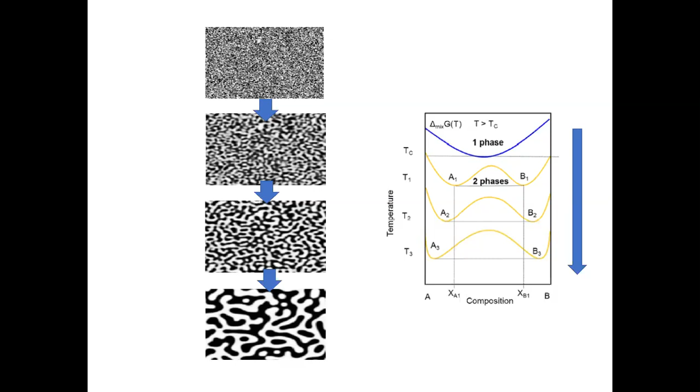And if you cool the system, and we know that just from the thermodynamic consideration, the free energy is going to develop a local minimum. This means that if you start with a composition right in the middle, for example, this composition will not be thermally stable, because we know by separating into two different phases with distinct composition, as suggested by the free energy curve, we can lower the free energy of the system, right? So this is what the system will do, lower the free energy by separating into two different phases. And this is basically the phenomenon of spinodal decomposition.

And we also discussed why you have curves like this, why the free energy wants to develop a local minimum as you lower the temperature. And one classic, very useful model to understand this phenomenon is the regular solution model, right? So you have a competition between the enthalpy of mixing and entropy of mixing. The entropy of mixing always favors the mixed state because this will always increase entropy, which contributes a negative term to the free energy. So increasing entropy always reduces the free energy. And the higher the temperature is, the larger this contribution is, right?

But on the other hand, if your enthalpy is competing against this effect, meaning that from the energy point of view, the atoms do not want to be mixed together because enthalpy increases if you mix them, you set up a competition between mixing and demixing, which is dominated respectively by the entropy of mixing and enthalpy of mixing. So the key parameter to determine which factor is going to win is the temperature, right? At a very low temperature, clearly I don't want to be mixed together because I virtually have no contribution from the entropy. The only contribution is going to be from the enthalpy. So I don't want to mix because this increases the free energy.

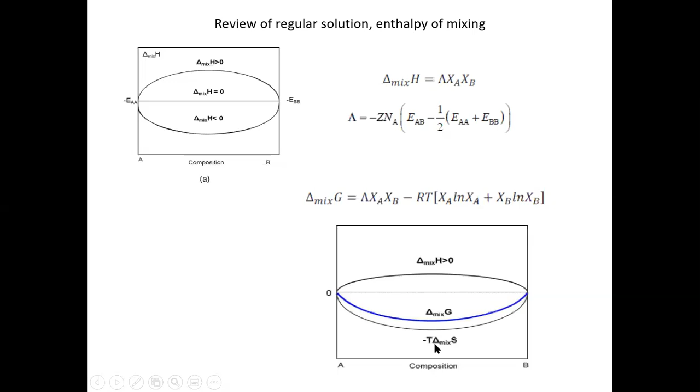But on the other hand, if you have very high temperature, now the entropy term definitely dominates and you want to mix together. From this very simple analysis, we know that as you change the temperature, you're probably going to introduce a transition because you're changing the role of these two competing effects. So at high temperature, entropy wins, so the system wants to be mixed. But as you lower the temperature, eventually enthalpy is going to dominate, and you favor the demixed state. So this basically drives the spinodal decomposition to occur.

That's the basic idea. And also from the free energy curve, suppose we have this symmetric free energy, which again is an example. We can easily use the double tangent construction, which we've seen many times, to construct the phase diagram. So suppose this is your free energy curve at different temperatures, and for each free energy curve we do the double tangent construction. We find the equilibrium compositions of the two phases, and then we map these compositions on the corresponding diagram here. And we're going to construct, in this case, a solvus, which separates the mixed solid phase and demixed solid phases. And if you connect these together, you have this coexistence curve. And this is basically the phase diagram.

And within this phase diagram, we know that, thermodynamically speaking, in the equilibrium case, if your composition is within this dome, you favor the two-phase coexistence scenario, right? If you're out of this dome, you can exist as a mixture. So that's basically what we already know from the discussion of regular solution and from the thermodynamic point of view. So this is kind of a recap of the regular solution and its thermodynamics.

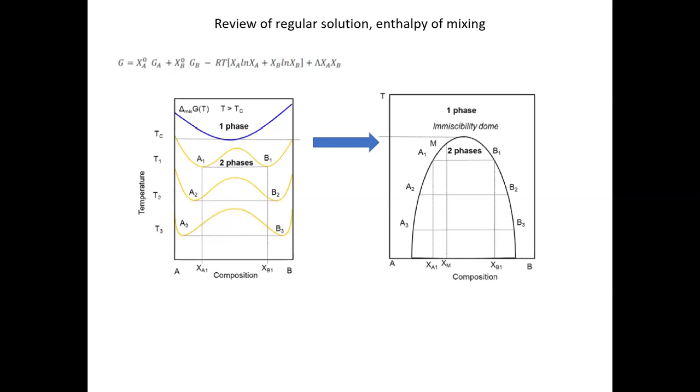So basically, from this very simple analysis, we see that although we know we can construct that dome, which I showed from the previous slide, something like this. Oops, why is it not working? Like this, right? And we know that any composition within this dome favors the two-phase coexistence as the more thermodynamically equilibrium state, which has overall lower free energy.

However, kinetically, if you look at the possibility to achieve that process, we see that not all the compositions within the dome are going to have the equal capability to really achieve that particular state of two-phase coexistence, right? We have good composition, we have bad composition.

So we see two examples, but mathematically, how do you distinguish the good composition and bad composition? What is the mathematical condition that tells you that this X naught is good composition and this is bad composition? If we think about what we analyzed, what's the key point to determine the good composition?

The key point is that if you start from a composition and then the composition separates into two different compositions, a minus and plus, the free energy after the small separation has to be lower than the original free energy. So this means that you have a curve like that, and this is your point. If you have a small separation and connect the straight line between that small separation, you want this straight line to be below the original curve. Does this make sense to everyone?

So this is a geometrical condition. But what do we call that mathematically? If we have a curve like that, we want the curve to basically curve down like this. What is the mathematical condition corresponding to this particular geometrical scenario? The mathematical term to describe whether the curve is going in this direction or in this direction is the convexity, or non-convexity or concavity of the curve.

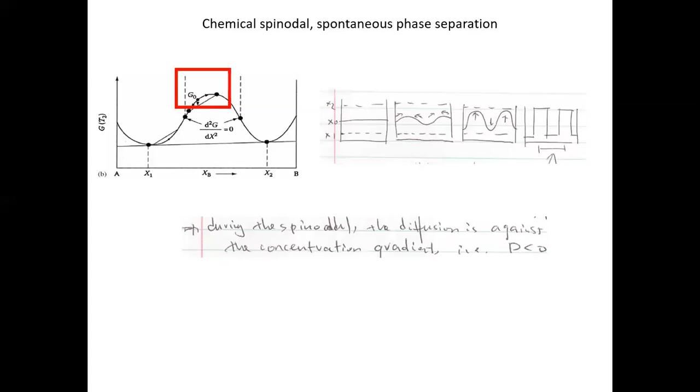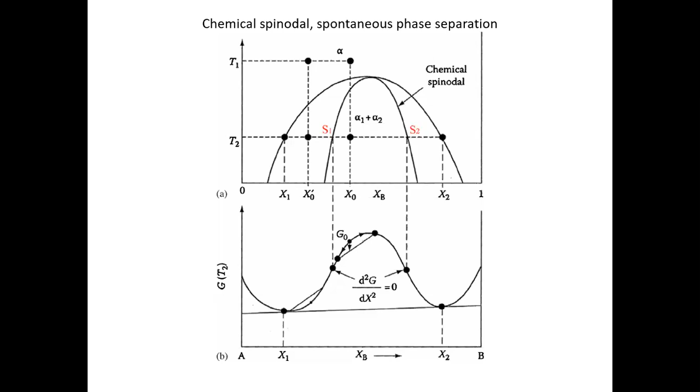show this. Okay, so I have a question about the miscibility gap, as defined. So this is a very good question. Typically, let me see. I think I have an explanation for that. So how do we define the miscibility gap? Typically the miscibility gap is defined as the outer dome. That's just from my understanding, but I think there might be a different way of doing this. But the miscibility gap is defined as the outer dome.

And then the inner dome or the inner envelope is typically what we call the chemical spinodal, which means that if you're within the inner dome, you have spontaneous instability. So you're never going to have any metastable state. If you prepare the system within this inner dome, there's no way that you can ever stay in the mixing state when you lower the temperature. But if you're, for example, outside the inner dome, there's still a possibility that you get stuck in this mixing state, although you want to be demixed.

So at least from the textbook that we're using, I think this is the notion that they define these types of things. But again, I'm not 100% sure if this is how the whole field is using it. Typically we just use the outer dome to define the miscibility gap, and the inner one is called the chemical spinodal, in which you have spontaneous instability. So that's I think what we agreed on. But feel free to correct me if you see people using a different notion in their own research.

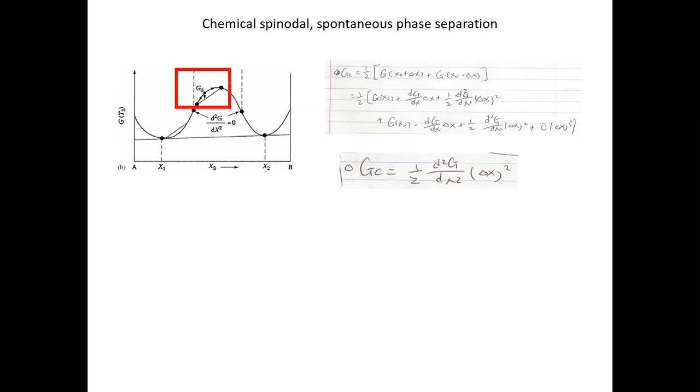But anyway, the driving force part I think is kind of clear for this one. And now we want to say a few things about the kinetics part, which is very interesting. The reason that it is interesting is I think you can already see, if you simply look at what happens during the spinodal decomposition, the normal idea of diffusion does not seem to be working here, in the sense that you start with an initial homogeneous mixture. But in here, there's no structure change. Everything's the same structure. So you're just dealing with diffusion alone.

So this is different from eutectic transformation and things like that. You just deal with the same solid structure and only deal with diffusion of the solutes, or motion of the solutes, rearrangement of the solutes into different regions. But the thing that you see here is that, from the diffusion point of view, if we consider this kinetics diffusive, this is going to be our starting point, right? And we did this many times when we discussed diffusion. You're going to start with a fluctuation like that, and diffusion will do what? The diffusion will smooth out the fluctuation and take you from this case all the way to this homogeneous case, right?

This is what we know about diffusion. It should go from right to the left. But if you look at spinodal decomposition, the direction of the evolution of solutes is completely different, right? In spinodal decomposition, you start with a homogeneous mixture.

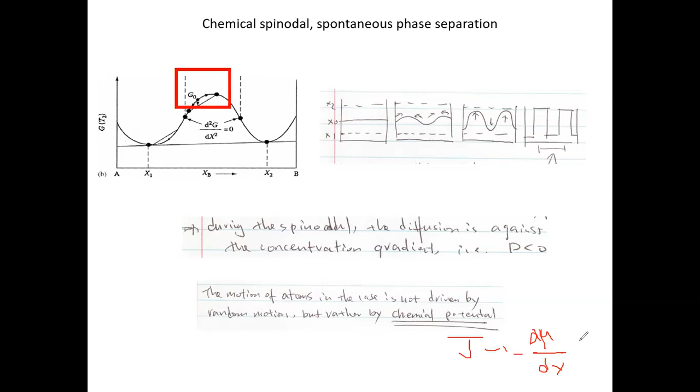But again, I won't go through more detail than this, but this is just a very interesting phenomenon to note, to revisit our understanding of diffusion and to see why here you have this apparently abnormal diffusive behavior, because now the driving force is not the concentration gradient anymore, it's the chemical potential gradient. Okay, so that's that part. So that's for the kinetics part.

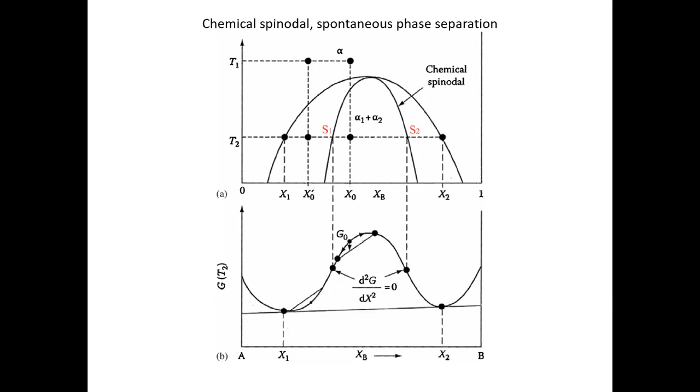And then, overall, if we consider the chemical spinodal, we have a slightly revised phase diagram, highlighting those regions for the very strong miscibility gap defined by the chemical spinodal, which we have already touched on.

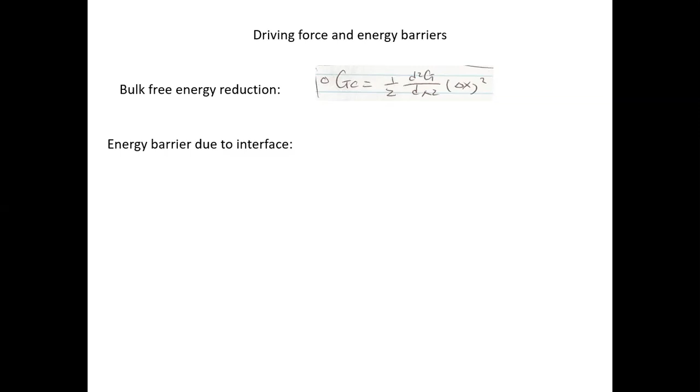So basically up to this point, we have talked about the driving force, which is the bulk free energy reduction if you're in a good composition regime, right? But we haven't talked about the barrier. I already showed this for you. So in this case, we also have a barrier, but this barrier is kind of interesting because the barrier itself is not very important in the beginning of the process, but gets stronger and stronger at the end. Now, what do I mean by this?

Well, if you think about a normal nucleation process, I'm just going to remind you, you start from a homogeneous liquid, for example, and then suddenly the fluctuation is going to create a solid. So this is kind of a very sudden process, right?

You just have fluctuations and the atoms within the small solid region get this crystal structure and you create a small solid. And at the same time that you're creating the small solid, you also create an interface, which is very sharp, in the sense that you can clearly distinguish liquid and solid structure. Does that make sense, everyone? I think this is okay.

And for the same reason, for the eutectic transformation, you have similar alternating stripes, but in most cases these stripes in the eutectic transformation have distinct crystal structures of alpha and beta phases, right?

So although you still have to worry about the difference of the composition, the crystal structure already gives you a huge increase of the mismatch strain energy that's going to cost you a lot for the interface. So those are the typical understanding of the driving force and the barrier, especially the barrier due to the interface.

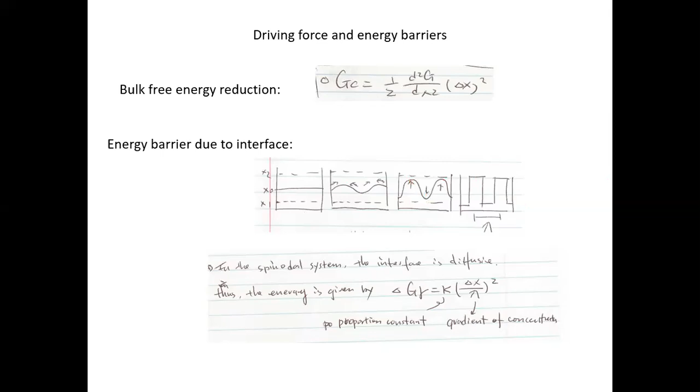So if you combine these two together, now we know how to deal with the driving force, and now we know how the interface plays a role during the entire process of the separation. So now we can combine these two together. Let me clear this.

Also there's a strain energy, I'm sorry, to the system. Although they have probably the same crystal structure, because the atoms are of different sizes, there might be a strain energy related to this. The strain energy is proportional to delta X, which is a composition difference, and K is the bulk modulus, Vm is the molar volume for the system, and eta I think is a strain.

So suppose the lattice here is A, and this changes a little bit. If you go from this region to this region, you have a change of the lattice. We're writing down the change of the lattice parameter as a function of composition. So if your composition varies a little bit from this region to that region, you have a slight change of the lattice parameter, and you get a strain here.

So for the same consideration, we write down the strain energy as a quadratic form. This is kind of a spring constant, and this is very much like the displacement of the spring. So you have this relation. Altogether you have another contribution, the strain energy, for the system. This is another source of barrier that you build in because it's a solid phase transformation.

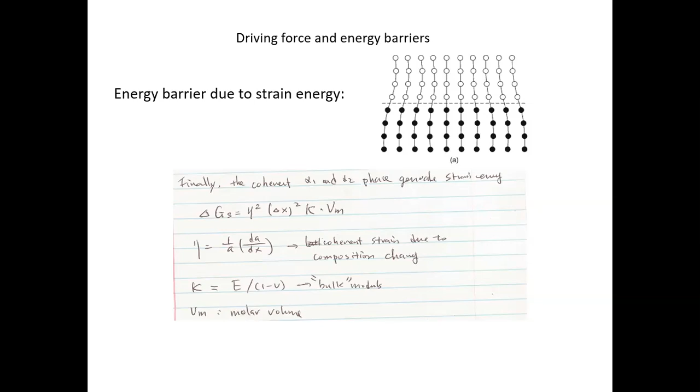So putting all of this together, we have the driving force, which is delta GC. We have the contribution from the interface, delta G gamma, which we already derived as this, and then we have the barrier from the possible strain energy, which is given by this. We were able to formulate all of these energy terms and barriers in the form of delta X, which is the initial fluctuation, the deviation of the composition from your initial composition.

So considering all of these terms together, we have the overall free energy difference for all composition, given by this. Now again, in the first set of analysis, we only focus on this one, because when delta X is very small, the contributions of these two terms are very small. So if we want to see whether the transformation can start or not by looking at the thermodynamics, we do not have to take into account these two terms.

But as the transformation proceeds, as the contrast of the composition gets larger and larger in the two regions, eventually the interface begins to play a role, and the mismatched lattice also plays a role. If you compare the terms, this one is going to be larger than this one, and this one larger than this one. Because they roughly have the same crystal structure, just slightly different lattice spacing, the elastic energy contributes least, and the interfacial energy next. This one may play an important role towards the end, but the major contribution is from the bulk free energy.

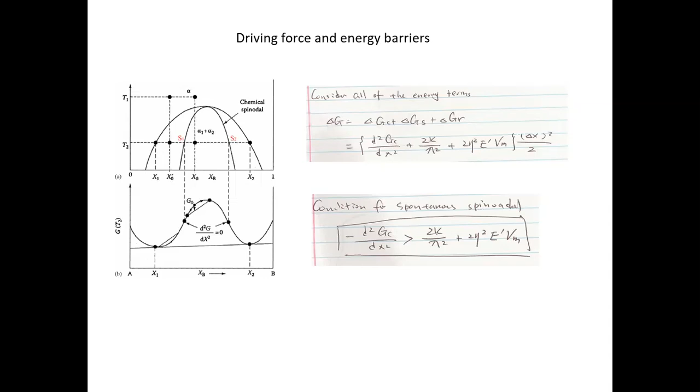For these systems, when you write down the phase field equation, basically you have to construct a free energy functional as a function of this field, right? This phase field, which is the phase parameter, which is this delta x. And for those cases, you need to worry about the development of interface, and we use very similar considerations and these ingredients to build into our phase field equations to simulate evolution processes, like the simulation that I showed. Let me quickly go back before this one.

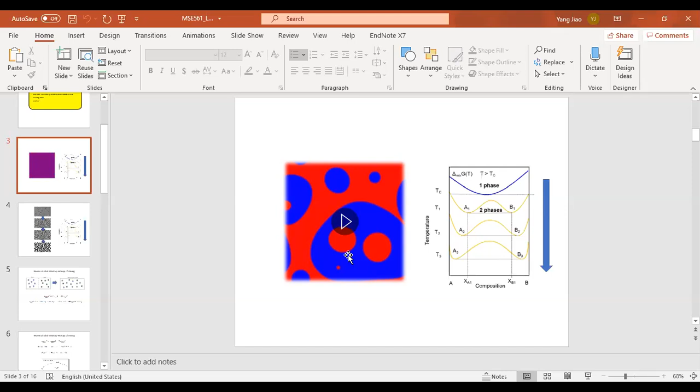Once it separates, it basically indicates that it satisfies the free energy requirement, but why does the system all become like circles eventually, or why are the interfaces optimizing? What is the benefit of having a circular shape? Reduced area. Reduce the area per unit volume, right? Initially the interface is not quite important, because we have a diffuse interface, but at the end of the separation, you have a sharp interface. So we want to minimize that.

In this case, there's no other way to reduce the energy, right? Because I already have the separation occur. So what I can do is reduce the interface area. I can optimize the shape so that it becomes circular, and this will lower the area of the interface, which clearly indicates the role that the interface plays towards the end. Okay, does this make sense, everyone? I think this is all I want to tell you about spinodal decomposition.

Okay, so this is just a quick recap of the topics. We introduced the concept, we revisited the regular solution model, which is beautiful for studying spinodal decomposition, and we talked about the driving force and barrier. And in the kinetic part, we showed that this is an excellent example of abnormal diffusion. In this case, the flux of atoms is driven completely by the chemical potential gradient and has nothing to do with the concentration gradient. So that's all I want to say about spinodal decomposition.

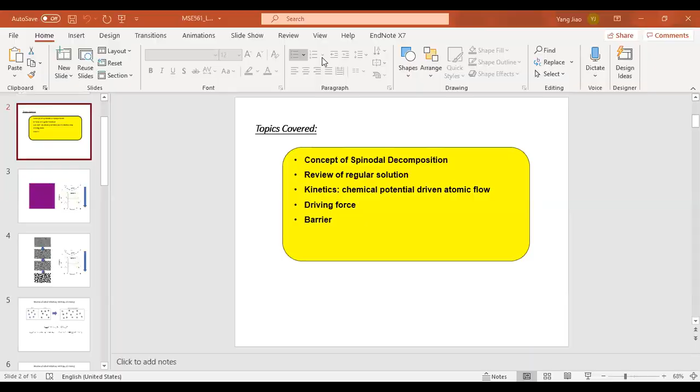Any questions before I switch gears and talk about, let me see, the last topic? Okay, so if there's no question, let me move on. This will be the last new transformation that we're going to discuss in the class. I know we've talked about so many different transformations, but I guarantee this is going to be the last one. So this is called martensitic transformation.

Or some people call this diffusionless transformation, and we'll see why that's the case. So if you don't have any questions about spinodal decomposition, let's start the discussion. This is a list of topics. We're going to introduce the concept of diffusionless transformation.

Okay, so if we have diffusionless transformation, this means we have diffusional transformation. And if you think about it, all of the transformations that we have been talking about are diffusional transformations, because they all involve kinetics related to the motion of atoms from one phase to the other, right? Whether diffusion is driven by chemical potential or by the concentration gradient, they all involve diffusion of atoms. But here, we have a transformation which involves no diffusion at all.

And as you can probably imagine, how can you prevent diffusion from occurring? You have to make the transformation very fast, and you have to cool the system so that the diffusivity of individual atoms is very, very small, right? So we can imagine that these transformations typically occur for faster cooling, and that is exactly what happens.

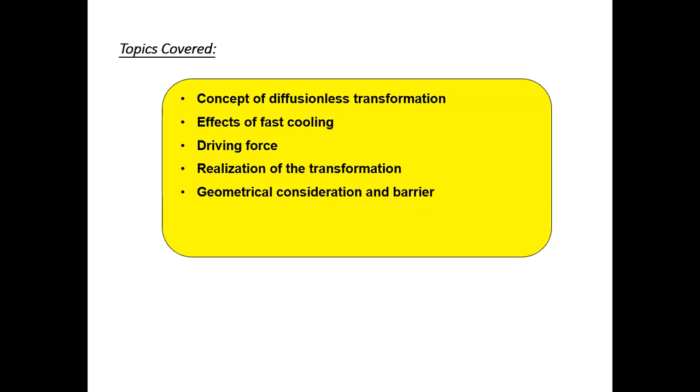And finally, we're going to consider the geometrical consideration of the barrier, because in this case there's no diffusion, right? So the barrier and the driving force are kind of different than what we have already considered before. So that's basically an overview of what we will discuss. It's quite interesting. It's completely different than what we already know. So it's refreshing.

So now, to introduce this diffusionless transformation, we just look at what we already know about diffusional transformation. Again, I'm looking at the precipitate nucleation and growth processes, which we looked at a couple lectures before. So if we start from the alpha phase field and then cool the system, physically what happens is that because we lower the temperature, we lower the solubility of B atoms in the alpha phase. So these extra B atoms are going to come out, like sugar coming out of a supersaturated water solution, to form a different solid phase, what we call precipitates of beta.

And we know that this process is diffusion controlled, right? How fast this beta precipitate can grow in both thickening and lengthening modes depends on diffusion. So this is a normal diffusive transformation pathway. However, now if I do not do this very slow cooling, giving the atoms sufficient time to diffuse around and grow into the beta phase, I do this very quickly. Typically we call this quenching, which means a very quick drop of temperature of the system.

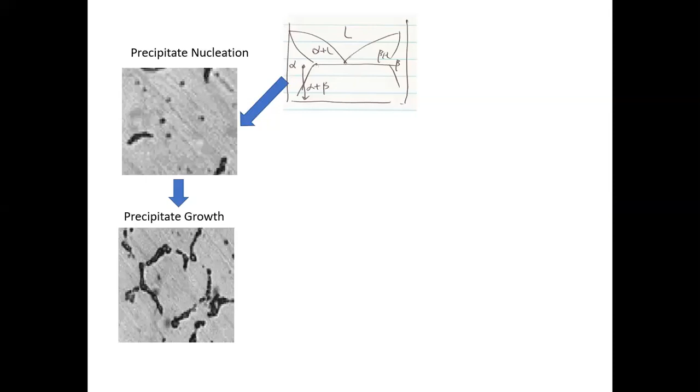So we do the quenching. What do you think is going to occur in those cases? If we do not give the atoms sufficient time to diffuse around, what do you think will happen? The crystal structure that's present at whatever temperature you had will freeze. Okay, so the B atoms are randomly distributed among the A atoms in the solution, right? But if you do not give them sufficient time to diffuse around to form a second phase, you just freeze everything in the original position. So this is very intuitive. And indeed, in most cases, the solutes are going to freeze where they are in the system.

However, they're very, very unhappy about this, right? Because they're stuck in this high energy state where they can't reach a lower energy. But there's nothing they can do through diffusion, because you already cooled the system to a very low temperature. The atoms are not moving around at that low temperature.

But nature is very smart. They actually adopt another pathway to lower the free energy, not to the best that they can, but still lower the free energy a little bit, through a global, fast transformation that involves the change of the entire crystal structure. So this is the martensitic transformation.

And the consequence of that is that you wouldn't see these precipitates, which are these dark regions. You're going to see these instead. These are not precipitates; you can clearly see there are features within the bulk, right? In this case, the grain boundaries are very clean. You don't see any precipitates, but you do see these things. These are what we call twin boundaries or shear bands. They're an indication that you have accumulated a huge amount of strain in the grains, and these strains are localized and released in certain narrow regions. That's the consequence. But why do you accumulate all these strains?

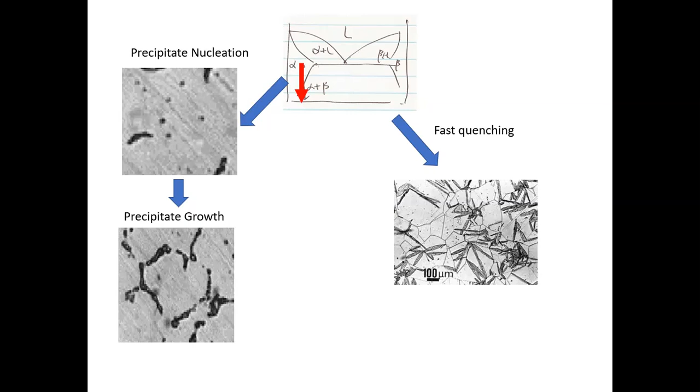But there's no way for the system to lower the free energy using the normal pathway involving diffusion, involving the motion of atoms. So they will adapt to a different pathway, which also allows the system to lower the free energy a little bit, but through a global transformation. So that is the martensitic transformation that we're going to discuss. Is this clear up to this point? I understand this is probably a little bit confusing at this stage, but we'll see an example. I think that will be immediately clear.

Okay, so basically the martensitic transformation involves no compositional change. It's a sudden global rearrangement of all the atoms and change of crystal structure. Now, again, this is a sketch of the transformation pathway as a function of the cooling rate. So if you cool very slowly, you're going to have nucleation and growth. You may not get the best results for that, but it's very tolerable.

But if you cool super fast, this is like 50,000 Kelvin per second. If you drop the temperature very quickly, you're able to produce the martensitic transformation. Now, the massive transformation means that you don't have a global martensite, but locally you have this mechanism happening. So this basically means that we have a very fast cooling rate.

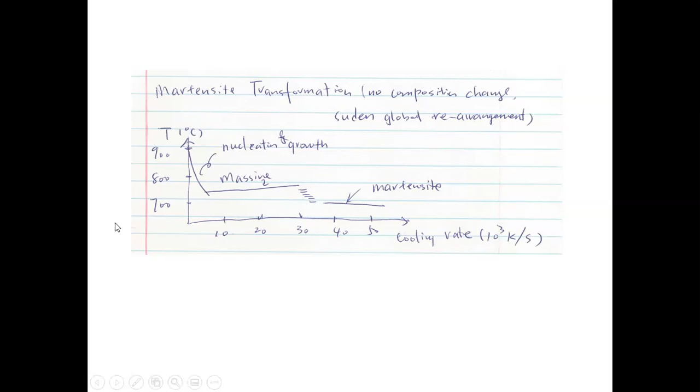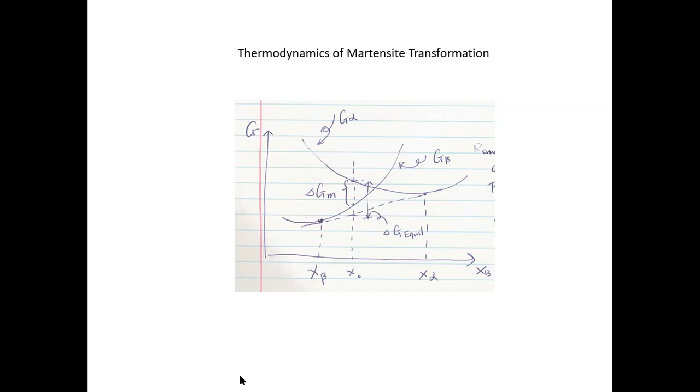Okay, so now if that's the case, this sounds a reasonable plan, but can you actually do that? If there's no pathway for you to freeze the composition but just change the structure, there's no way for you to achieve this, right? So it's a promising driving force, but kinetically there has to be a pathway to realize this. Is there a pathway to realize this? The answer is yes, of course, because we already know this occurs.

But I don't think I have time to finish this. But I will start. Okay, this is quite interesting. Now suppose, and this is where I know that I get a lot of questions, so I'll try my best. Suppose that my alpha phase has an FCC structure, and my beta phase has a BCC structure. This is quite reasonable because they're all cubic structures, but they're different.